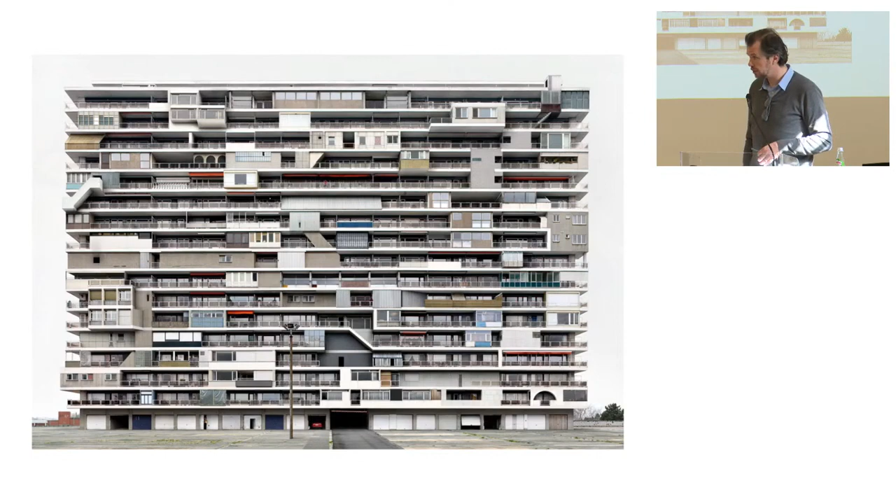So I had to find a way to make new imagery where I had control over every aspect of an image, at least as a representation of architecture through an image. And that's how I came up with this technique of the photorealistic photo collage, that exists out of fragments of photographs of real buildings. So all the collages you see are constructed by images made by me.

Not my regular architectural photography, but I really go out in the field. I make a design, for example, and then I go out in the field to photograph all the textures I need for constructing this fictitious building.

In the beginning, I was very interested in the building as a sculpture in space, as a volume with its own silhouette, with all its techniques to make a building spectacular, like the cantilever. It's a trick in architecture that's often used to make a building expressive. So I give comment on that.

I reconstruct it, I enlarge it, I make it more radical to the point that I think it's still plausible. So I walk on the thin line between reality and plausibility versus science fiction. It's a fine line, and I try not to cross it.

Also, humor is part of the work. It's a very difficult subject in architecture, I know — maybe that's content for a next symposium. But of course, I'm a Belgian, and Belgian surrealism is apparently in our genes. So the surrealistic humorism is certainly present in my work.

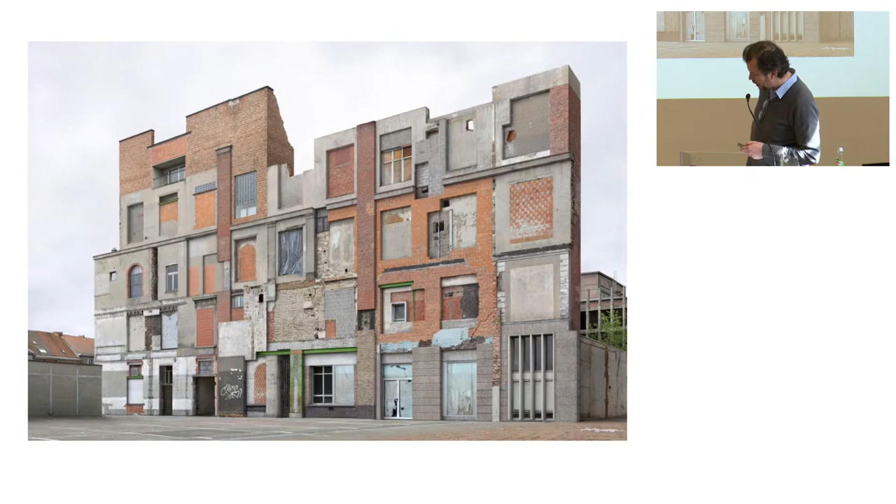On a slightly larger scale, I made an intervention in the concert hall of Bruges. It's a quite iconic building in Belgium, designed by Robbrecht and Daem on the outskirts of Bruges. It's a very finished box, and for me it was very challenging to question when a building is finished — when it becomes an icon, is it then becoming a dead building?

For me it was very interesting to question the status of this building by adding tiny additions in red brick. And on the rooftop, I built this small structure in actual bricks, to be clear — it was really built on top of the silhouette of this building.

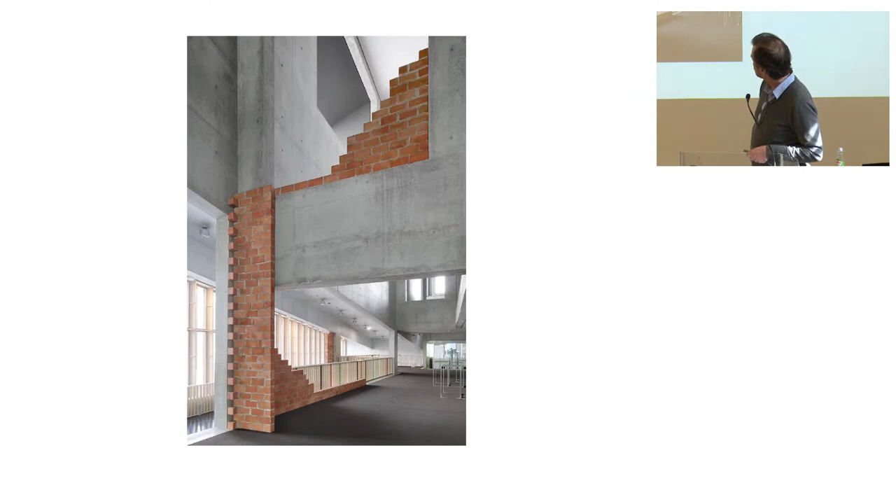And on the inside, in these concrete spaces, I made these alternative structures — of course completely nonsensical, without a program, but only questioning the status of the actual space by adding new structures, suggesting an alternative logic to the building.

That image became the basis to again build an actual installation, in a museum in Hasselt, in Z33, where I built these parasite walls inside the white museum spaces, and they give another view on the city, or a slightly different view on the city.

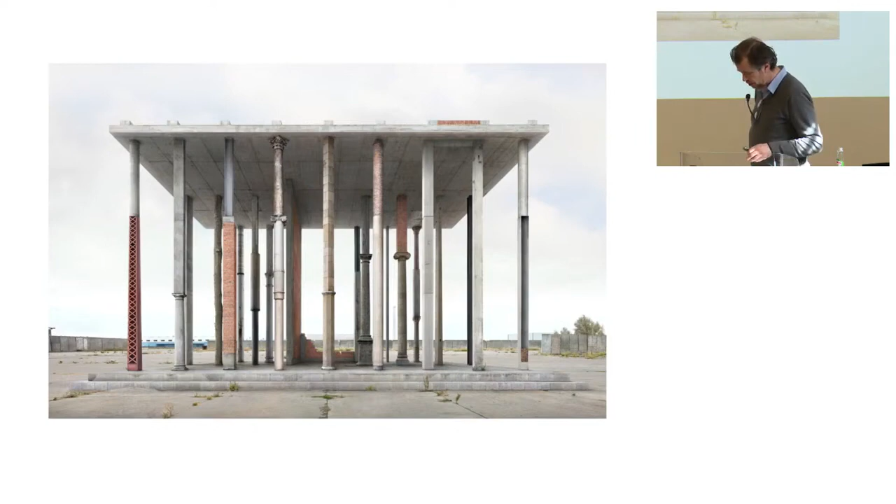You see them here standing in the garden, just standing on their own. In fact, it's also a celebration of that typology in architecture, just by placing them as such without program, as a kind of folly architecture, just bearing a roof placed on a stage of two steps.

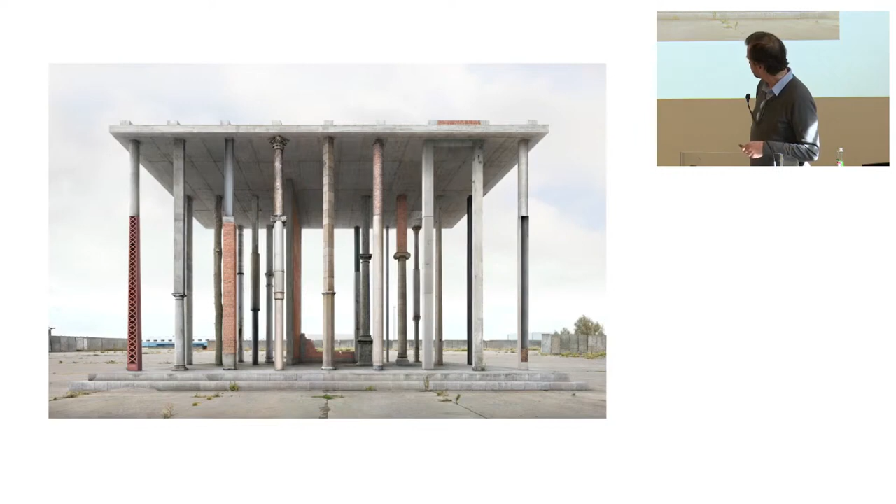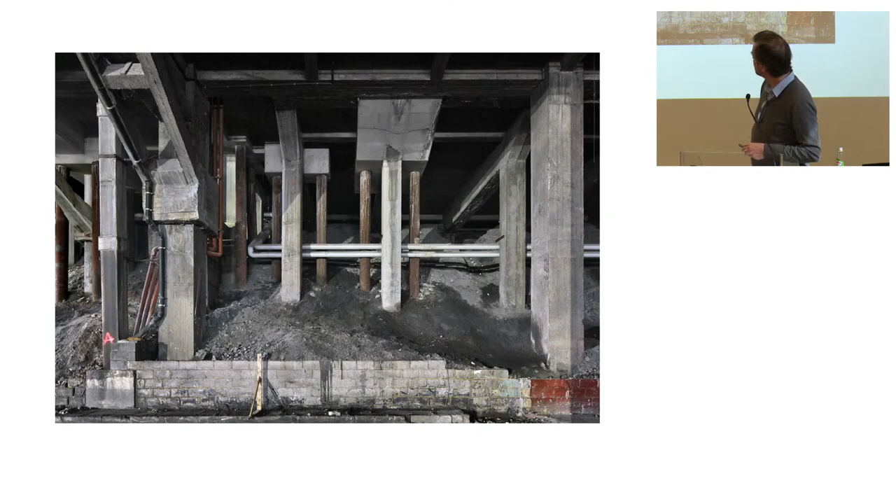This resulted from a reference to an actual architectural photograph I made of a project in Belgium. Before renovation, this was the cellar of an old Congress building in Charleroi, and it was amazing to see that the upper floor was supported by all kinds of weird columns in different shapes. So this really made a reference to the previous image.

The column, again, I made this installation in the same museum, and I displaced this column, and I put that on a step of the staircase. So you have a completely other appreciation of this typology of a column. Just by climbing the staircase, you have this sequential vision of what a column actually is.

Then I made this column, a bit of reference to Brancusi, of course. This stacking of this very basic breeze construction bricks into a five-meter high column. That was very funny to see, but I don't have the video. It was moving in the wind, so it was a moving column. When the wind blew, you saw the bricks dancing in the air, so that was quite nice.

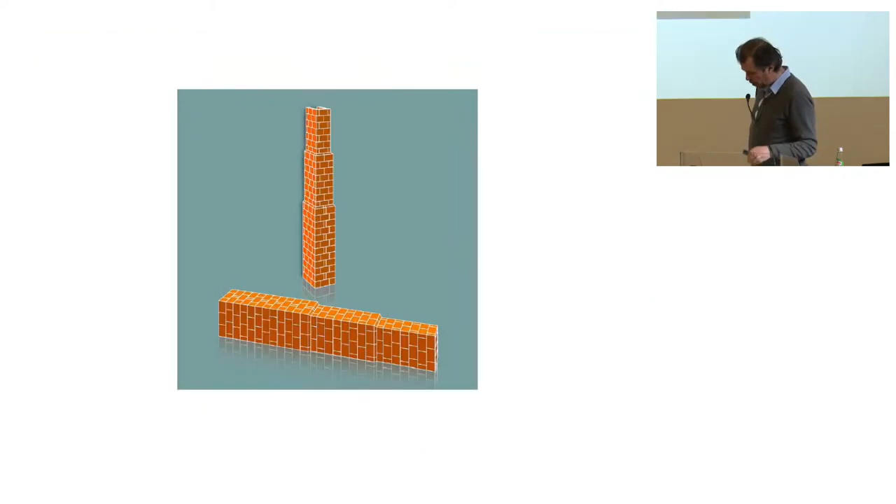Another typology, very common, is the buttress or the support of a building. And this typology I applied in an existing castle in Flanders, a castle in a very bad condition, almost crumbling down. It's a very iconic place, but not well maintained. And there I built these two buttresses that I wasn't allowed to touch the building, ironically.

So it needed really support, but I couldn't touch the building. So it worked out fine that the buttress stood on its own, and it had to keep itself in balance. It was not leaning towards the architecture. And the other one was already detached from the building and was floating in the water.

As an insert image, you could say, is that architecture, if I may say so. I'm not an architect, but I guess architects have to work with a certain vocabulary, with some elements that are fixed. You still have to work with the door, and you have to think about the door every time, and where to place a window, and how the roof will look like.

So, in essence, an architect has a shelf in its office and has to take, metaphorically of course, the right elements and put them in a certain order, and then you have architecture, probably. So this is a kind of vision of a giant shelf where you can pick all the pieces you want.

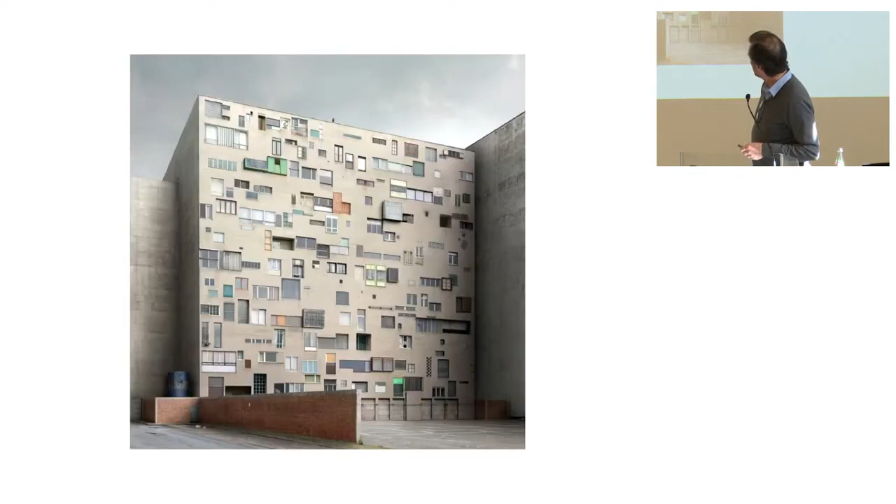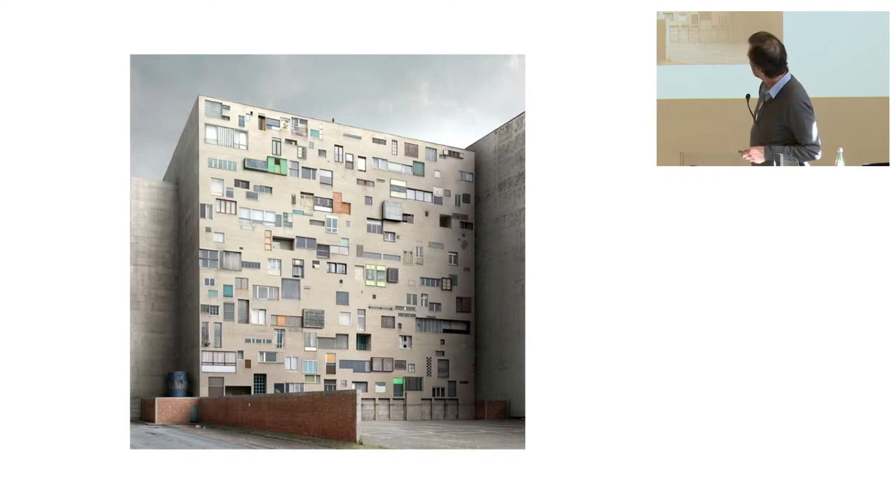A next image, a collage, I think it speaks for itself. It's a kind of time lapse of different styles of windows compressed into one building, expressing the identity of the inhabitant.

Another project, also dealing with the basic typologies in architecture, but placed in a certain sequence. This is a project near the river, the Leie in Kortrijk in Belgium, where I built in essence a wall of around 40 meters in length. But the wall is kept straight by all the basic typologies in architecture, like the roof and the chimney and the arch and others. It's a kind of compression of the language architects use in one gesture.

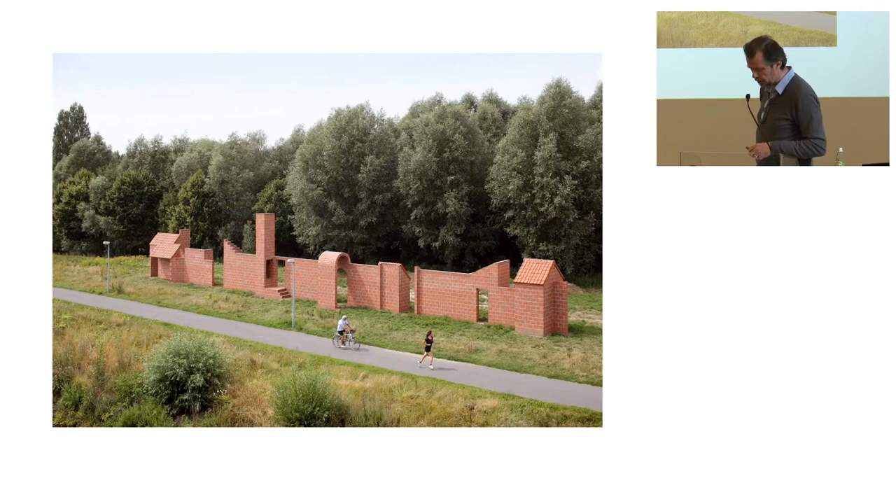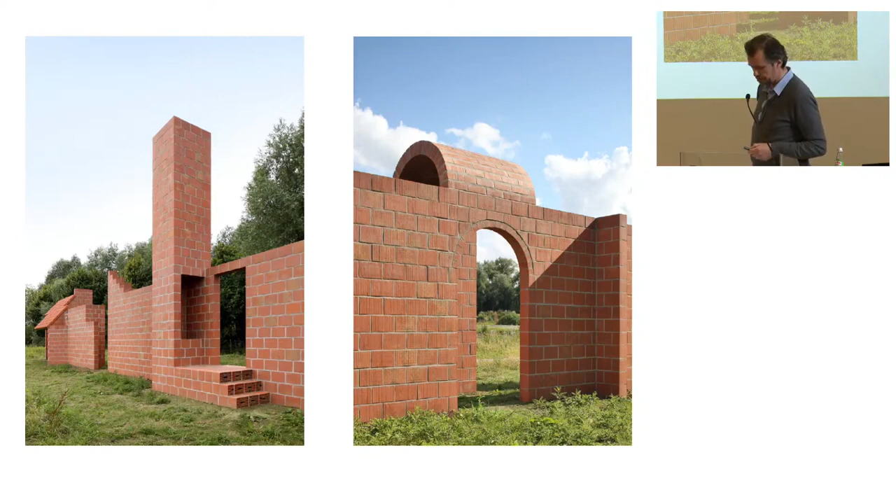Of course, the roof is the fifth facade of a building, a bit underestimated often.

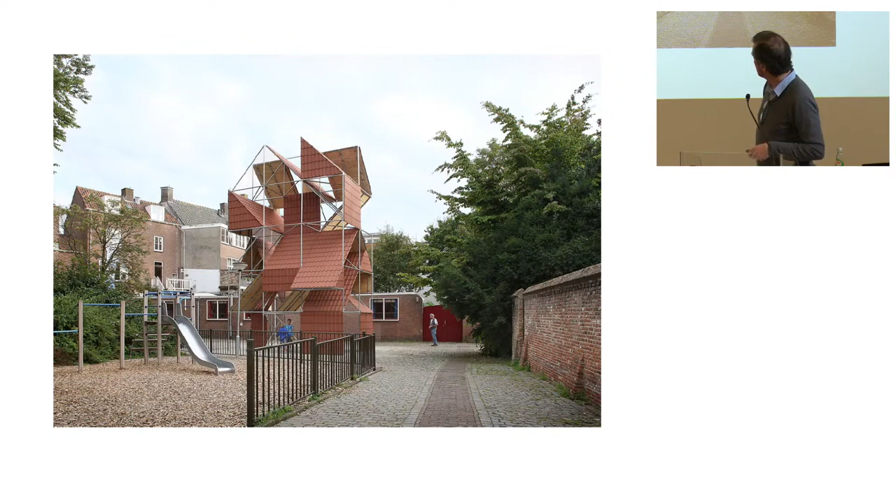This also resulted in a spatial installation in the midst of the historical city center, where I used the roof as the fifth facade and as a typology in a kind of spatial grid, using ceramic roofings in a certain sequence — a metaphor for compressing the city into one gesture, with the size of an average house in the city.

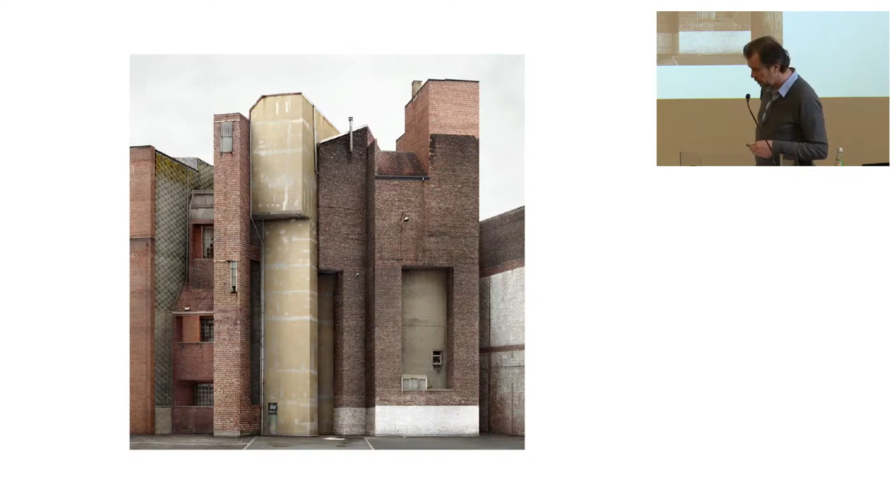Of course, architecture is all about proportion, proximity, and silhouette. For me, it was quite interesting to explore how an ensemble of maybe not-so-interesting separate parts can become exciting if you put them together in a certain sequence with a certain proportion.

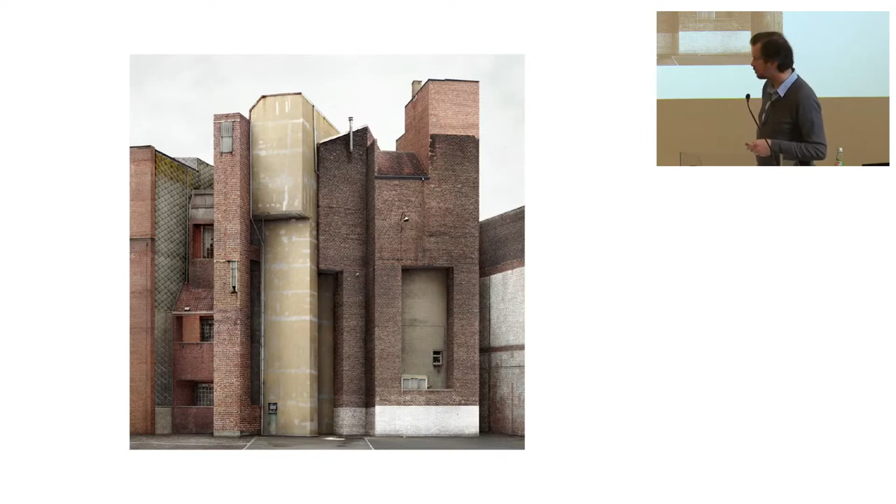The same is going on here. It's also exploring the tectonics of a building. It could be a high-tech building, but it's executed in a very low-tech way. This contrast between the planned and the improvised is also quite present in my work.

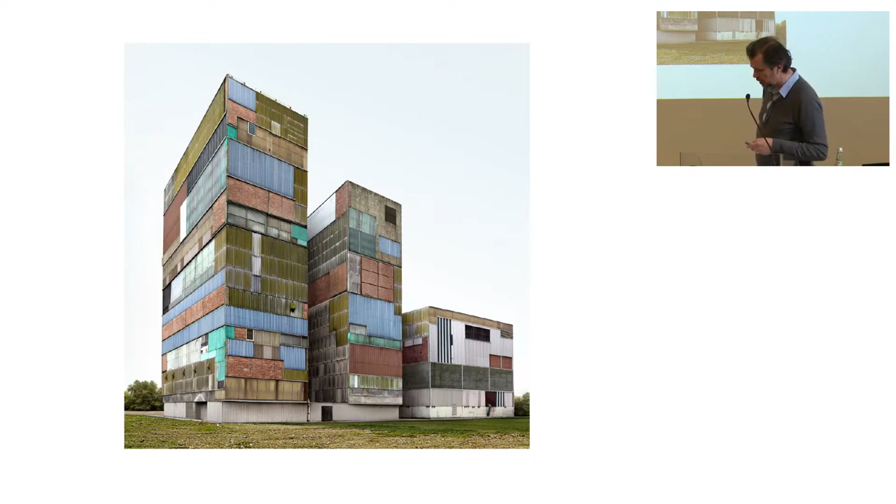Even on a bigger scale, this is an inventory of some Chicago towers, but placed in a different grid, and together they form the silhouette of a big house.

Also thinking about nature versus culture, or nature versus architecture, and all the zones in between — the transition between the city and nature, and where it collides. So this is a collage dealing with that.

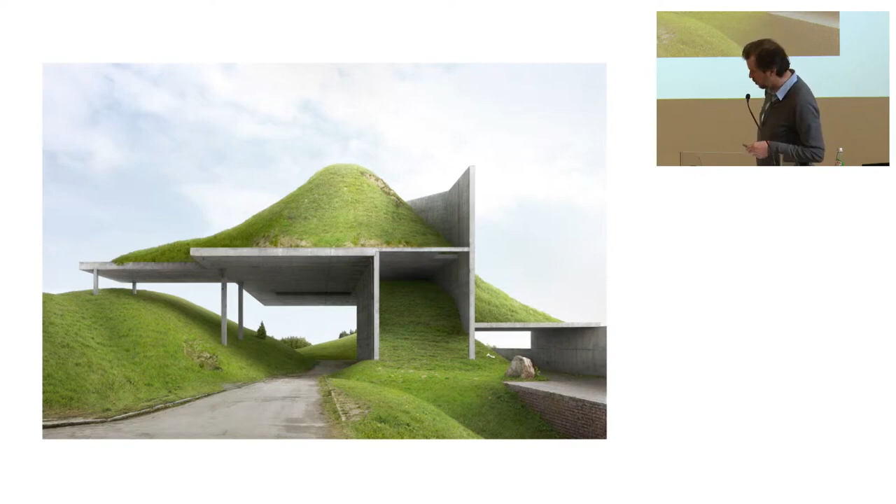Another collage — you can question which thing was first. Was the rock placed there afterwards, or the other way around?

That resulted in a project where I used this rock, and I worked on it because the original rock was really an existing rock in Morocco I photographed, placed on the Belgian coast. This is the same silhouette of the same rock, but executed in concrete.

I photographed these fake grottos in concrete — you find them everywhere, this fake rock in concrete — and I put it on the original silhouette of the rock. Then it was printed on a giant scale, on a kind of billboard, and placed in the midst of the landscape of Bruegel.

You were talking about — no, who was talking about Bruegel? Val. Yes, this was for a project for the anniversary of Bruegel, who worked and lived around Brussels in this typical landscape. He painted that landscape with rocks, so he was a kind of Photoshop artist avant la lettre.

So what I did was use the same technique as Bruegel, putting a rock in the midst of this landscape where it doesn't belong, of course — a Fremdkörper. I made it even more artificial in two ways: it's in concrete, and it's flat. This is an emphasis on the artificiality of the landscape in general, and specifically the Bruegel landscapes.

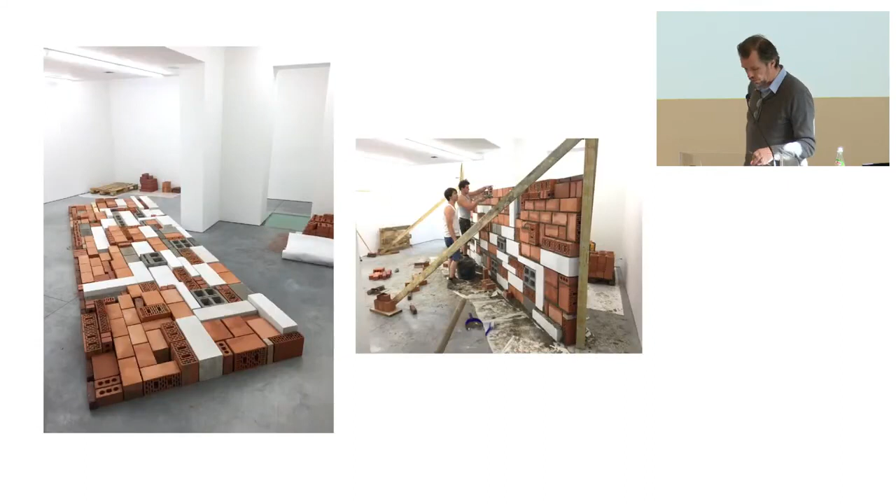Speaking of cities, another project I did in a gallery was building a wall with the most common building materials, bought at the do-it-yourself market — these breeze bricks and Ytong bricks. I built this very well-defined wall as a metaphor for the complexity and diversity of a city, compressed into one wall. In the end, the wall was erected and looked like that.

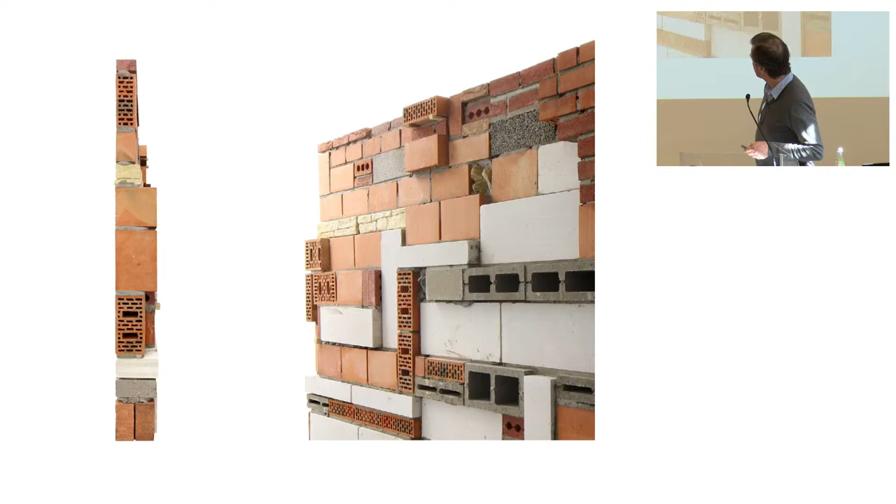It reminded me of the Pikionis architecture on the Philopappos hill and the Acropolis hill in Greece, where the architect used remnants he found on site, old remnants, and built these beautiful pathways and a new wall around an existing church. This is a fragment of that church wall.

Another one in Greece, on the island of Paros. I found this incredible building existing out of fragments of ancient Greek buildings, which were later stacked in a different way into this amazing tower-like building.

In the end, I think the fate or destiny of a lot of architecture is to be crumbled again to dust. Not in Rome, but in some other places.

I made this virtual pile of building debris where, if you look very closely, you can see all kinds of references of contemporary concrete, but also these ancient columns and statues. So it's a kind of compression of architectural history in a very deconstructed way.

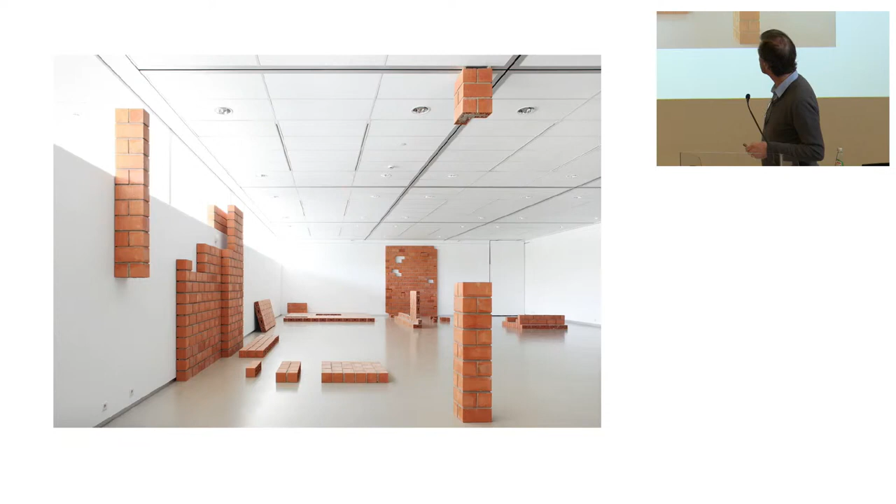And then out of the rubble, new architecture emerges. The most basic architecture, as I heard already, is creating a void. If you build a wall, you have a boundary. You create an inside and outside space.

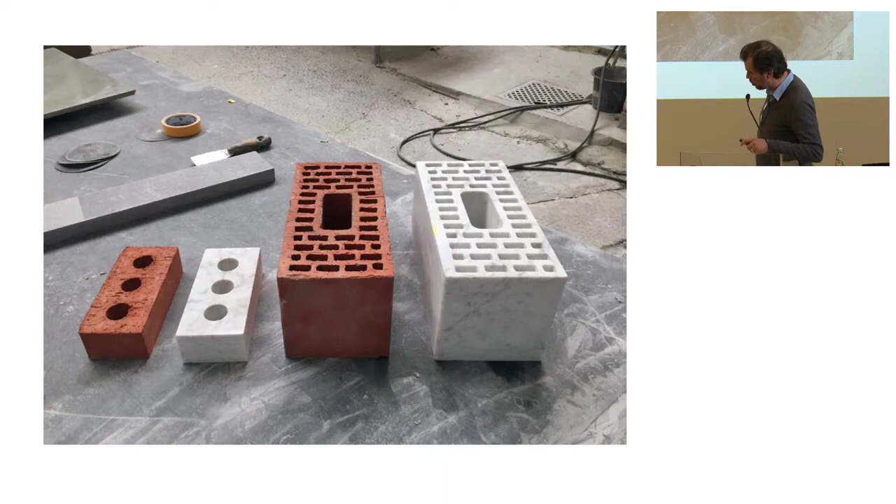And then, to celebrate my fascination for the brick, or the breeze brick in general, and the potentiality this pixel of architecture has, I made a replica of this red breeze brick in Italian Carrara marble.

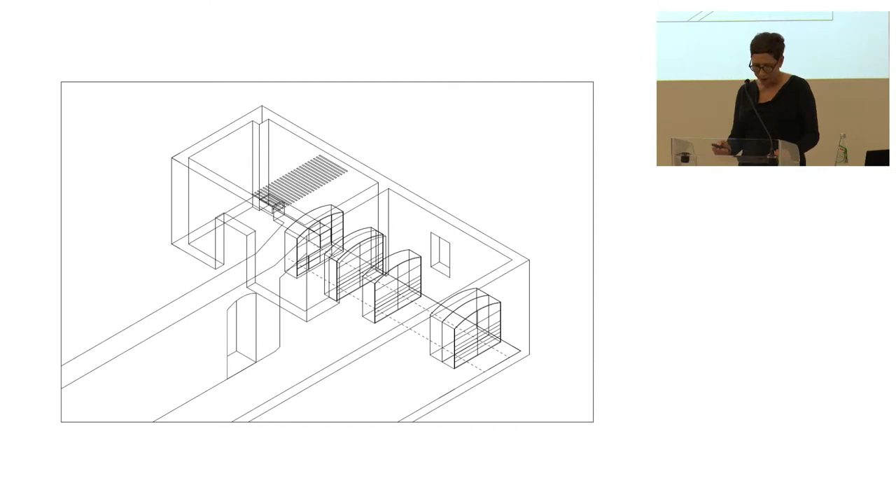The design concept for the space is based on the intention of largely retaining the studio rooms and kitchen as they were furnished by the artist. The new piece is made up of several elements painted the same shade of white as the walls.

When pushed together and closed, it forms a solid unit. When open, its differentiated and colored interior is revealed, whose outer contour corresponds to the existing opening between kitchen and studio. So you can see the kitchen in the back.

In order to use it from both rooms and also allow the closed unit to be moved to either side of the opening, it was equipped with trolleys and rails, and laid in the floor.

The piece of furniture makes it possible to set up the workshop in the heated kitchen in winter and close the opening. A dimmable light panel on the joist in the kitchen reinforces the room concept by accommodating and developing the lighting system, which consists of rows of narrow fluorescent tubes as found in the studio spaces.

The tubes in the studio space were still decided for by Michel before he died, and we took the same tubes and made this dimmable set of tubes to allow for the kitchen to be an exhibition space when lit, and to be a kitchen, or the kitchen, how it was before.

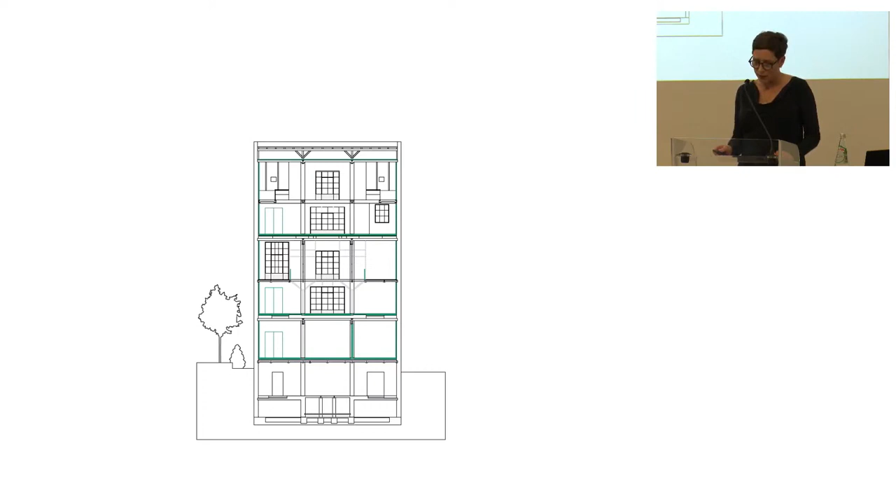The building in Berlin-Mitte was designed by the architect Hans-Heinrich Müller in 1928 to accommodate distribution facilities. The listed building was later used as a substation, which had been disused since 1998. Its facade of red blend brick and the vertical bands of narrow windows, behind which a sculptural staircase leads to the utility stories, are clearly visible from Neue Grünstraße, as the original front building no longer exists.

The transformation envisaged a change of use in the former substation and its grounds into an art gallery. To achieve this, the building was gutted and its steel skeleton exposed in the process.

We didn't touch the staircase, and with the people who were responsible for the Denkmalschutz, we discussed that we would protect the facade and also the space behind. So it's a kind of 3-dimensional facade that was protected, but the room behind was transformed.

We also worked with Anne Borsell, who's missing. She cannot be here, but she consulted us as a lighting designer, which is very nice.

Here you can see the floor plan with the neutral space. The basic layout contains 3 double stories with slightly raised ground floor and 2 exhibition spaces above, each consisting of a full floor and a gallery floor. This is what you can see here. This is the second double height exhibition space.

The architectural concept is twofold. It is based on the preservation of the facade and the staircase with industrial glazing, which is typical for the period, and on creating mainly neutral spaces at the rear.

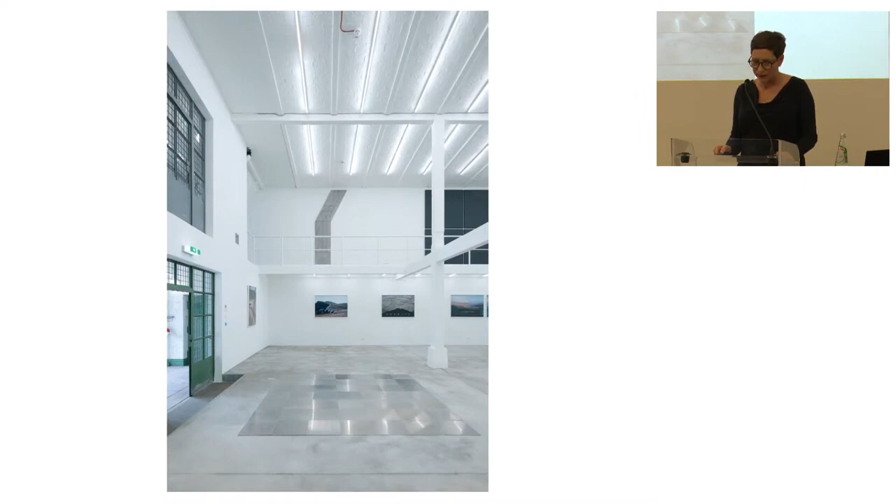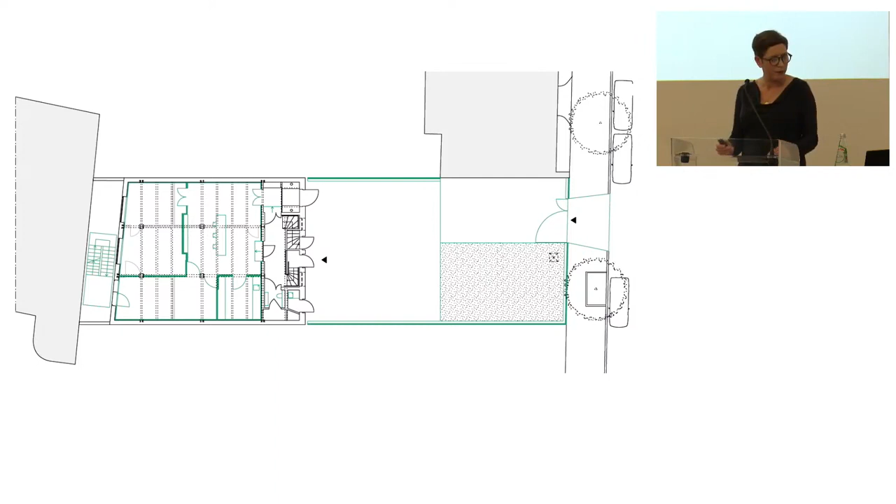Along with the renovations in line with heritage protection requirements, the necessary structural improvements, and the installation of building services, special attention was paid to the gallery spaces, their surfaces, lighting fixtures and fittings, as well as the fenced-in grounds. So there's a garden in front because the building is missing that was there before.

And here you can see an artwork by Thomas Schütte. We also met Thomas Schütte before. So it's a kind of rotation, I have the feeling.

And the garden we made, the fenced garden we made, and also the view on the public space of the street with new developments from the 1990s, because this site is almost where the Berlin Wall had been, so it was a vast part of the city.

So the last project is a housing project. It is in Fürth, in the south of Germany. You can see, again, a Wilhelminian building. It's very different than Berlin. The city became rich in the second half of the 19th century during industrialization, and it was based on more than 20 mirror factories in the city of Fürth.

This is not a mirror factory, but it stands for the industrial past of Fürth. And the project is the transformation of a former mirror factory. We couldn't keep the buildings because of all the poison, the quicksilver poison in the ground. We kept one brick building, a kind of forge that is now a workshop.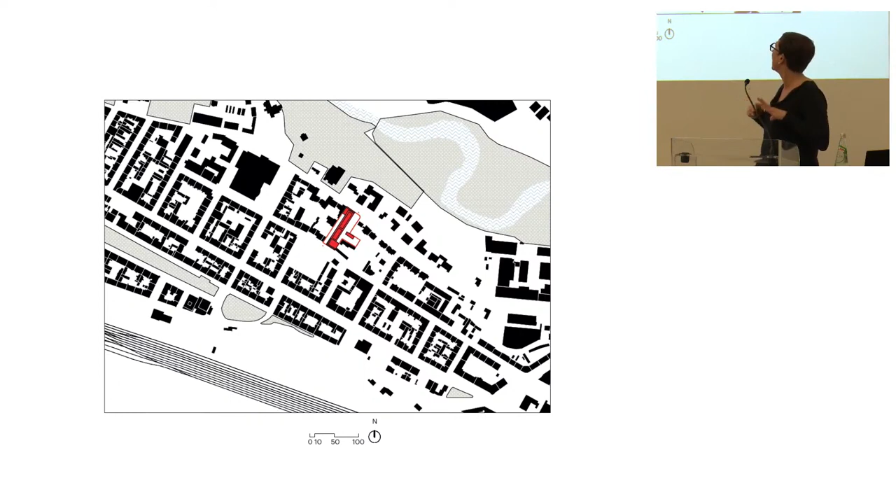And what is interesting about the site is that it goes through a block, so there's block buildings on one side, and then it goes down 4 meters. And on the other side, in the north, there is the river Pegnitz and the lands that come with it - it's the city park now, but it's rather a landscape and suburban part of the city.

And we also found in the inner city, in the medieval city of Fürth, these passages, and we proposed a very dense building on the site, not without proposing a public pathway through the site from one street to the other.

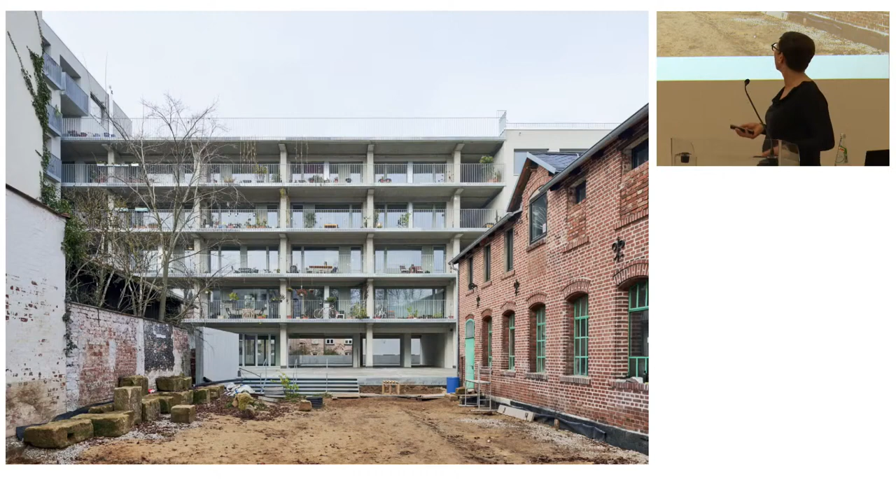This is the forge on the right side, so this is in the middle of the site. This is a detail of the galleries that access the apartments. And this is the most important plan from my point of view. It shows the ground level, and you can see that the ground level has 2 heights.

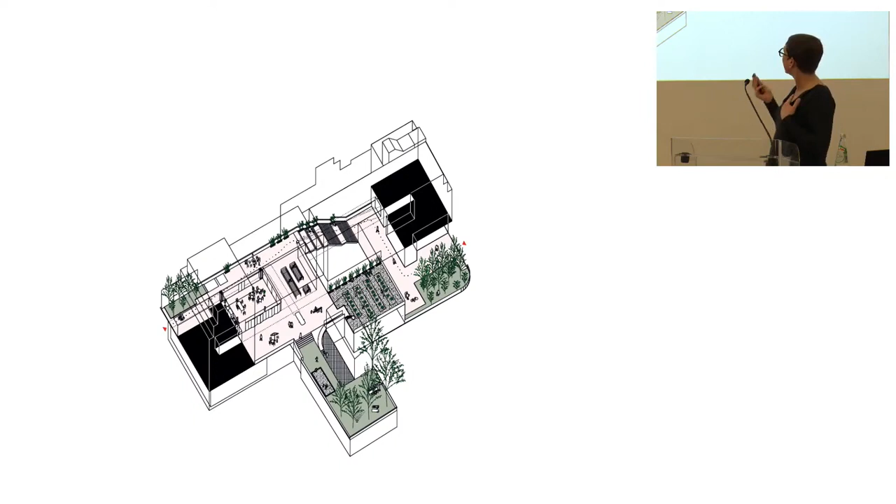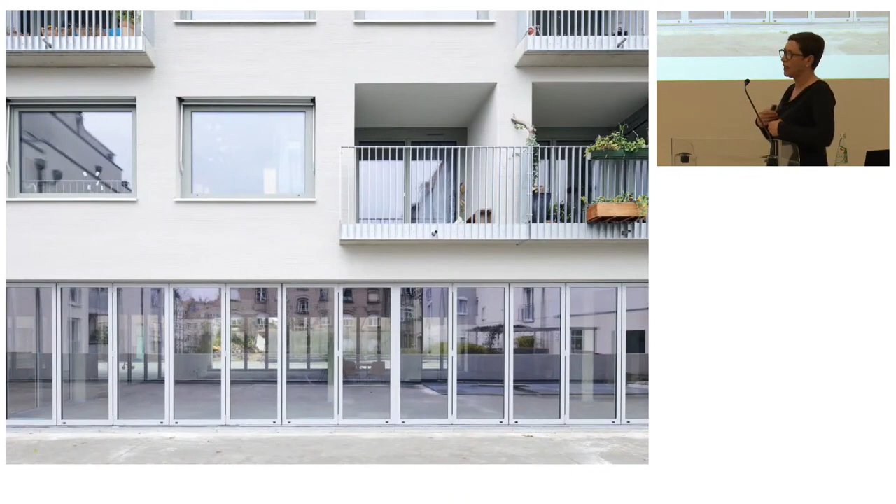And we worked in detail on how the ground level could be enriched by different spatial characteristics, such like gardens, the pathway, a staircase that also serves as an auditorium. And there's also a communal space, it's called the Spiegelsaal, and it can open widely, and then it is also connected to the public pathway. And this is the staircase still covered, because it was still the construction site.

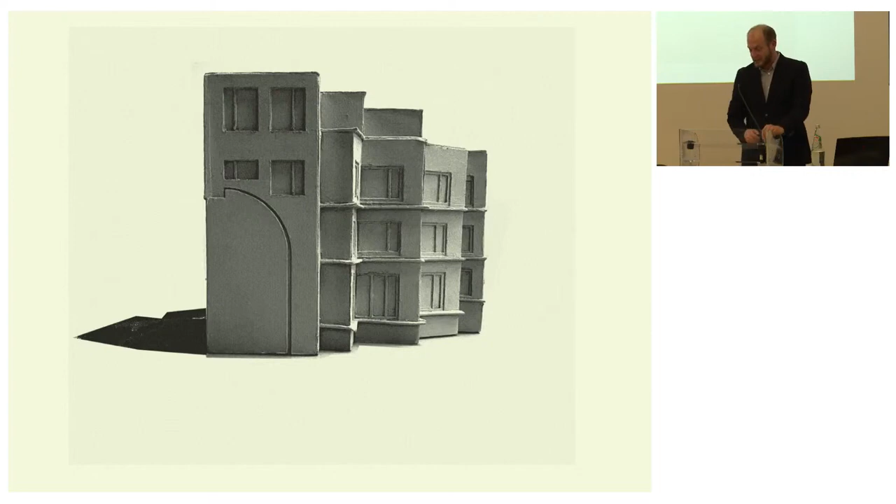This is a building that we are currently working on. These two references, Palladio and Borromini, we had in our minds while working on the small domestic building in the medieval city of Grave, which is in the east of the Netherlands, close to the German border—something we have on our tables currently.

The building is situated on a triangular plot, and it's visible from all sides. It's close to an old fortification wall. The building marks the entrance of the historic city, and therefore wants to relate to the existing historical buildings there, which might best define it as a sort of oxymoron, as it has to unify two demands in one—blending in as well as standing out and announcing—with an ambiguous building as a result, merging several buildings into one.

And the remaining fortifications in the city of Grave also comprised a former gate, which was later transformed into a local museum, where we were making a relation to this old brick structure, although it would be impossible to ever experience both at the same time.

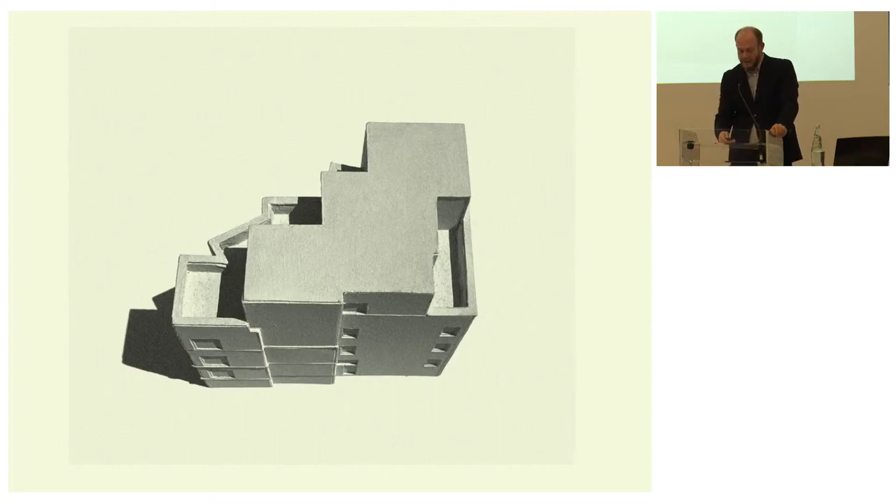Among several questions for us, the most prominent was how to act in public, although initially fit for a domestic function. Simultaneously, the aim is to charge this building with a theme that goes beyond the private and refers to the public. This building should not literally become a gate, it would not fit on the plot. Therefore, we would follow the strategy of making a building that suggests being part of a bigger whole, making a relation with the official gate, containing elements indicating the former fortification and making visitors aware of entering the ancient city.

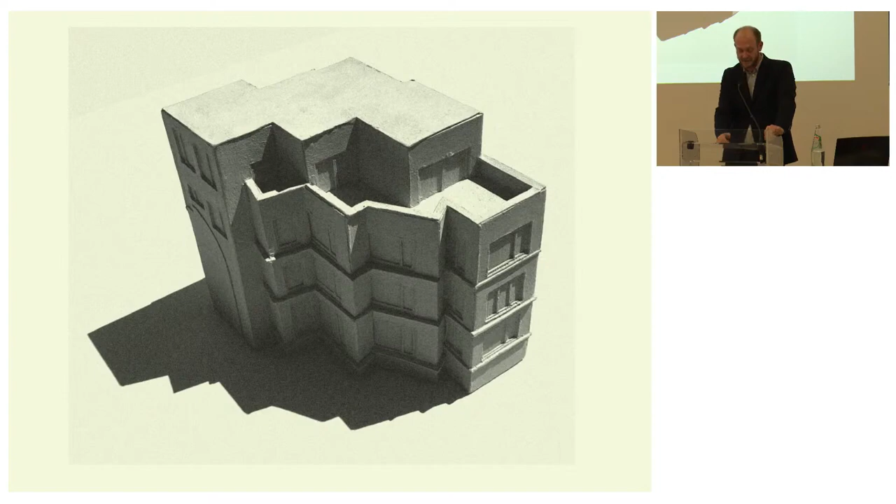In this specific situation, a balancing act between being figurative and being abstract was required for building up a narrative without using all the possible vocabulary, how to suggest being a fragment of a larger whole. The internal structure of this building is made secondary in order to shape the building by its urban setting and its role as a gate building.

The inscribing of the new building into a longer line in the history of the city is made primary. Not everyone will understand this implicit invitation to explore. Suggestion is an attempt to evoke curiosity, and of course this also requires a refined observer. As you can see, it's still a model. It might get realized, I hope so. Otherwise, it just remains a suggestion and exists in the world of ideas.

Although we as architects were trained in clearness, completeness, and efficiency, it is necessary to allude to other questions and build up narratives on other logics. When no full cohesion exists any longer, one is forced to recalibrate and explore other forms of order and other orders of form.

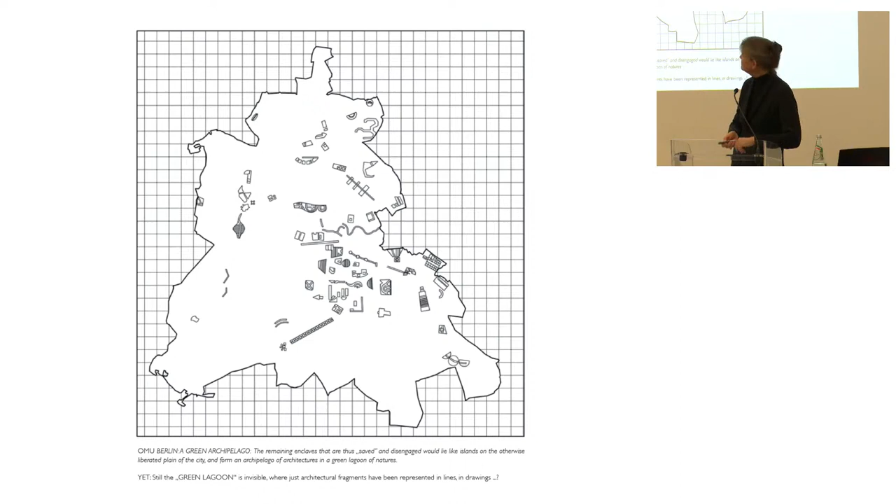On the other hand, when you are in Rome and you see all these fragments of the wall, of the aqueducts, and the Aurelian wall or the other city walls, they still exist. I think this fragmentation of the wall gives us a hint how much the wall as a fragment will influence our perception of space. And this is maybe the point where I would start, that my perception shifts when I have a fragmented wall in front of me.

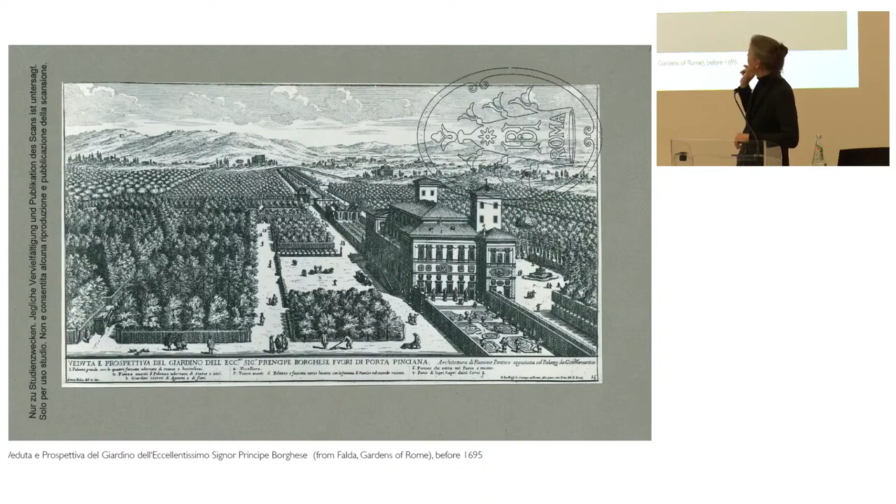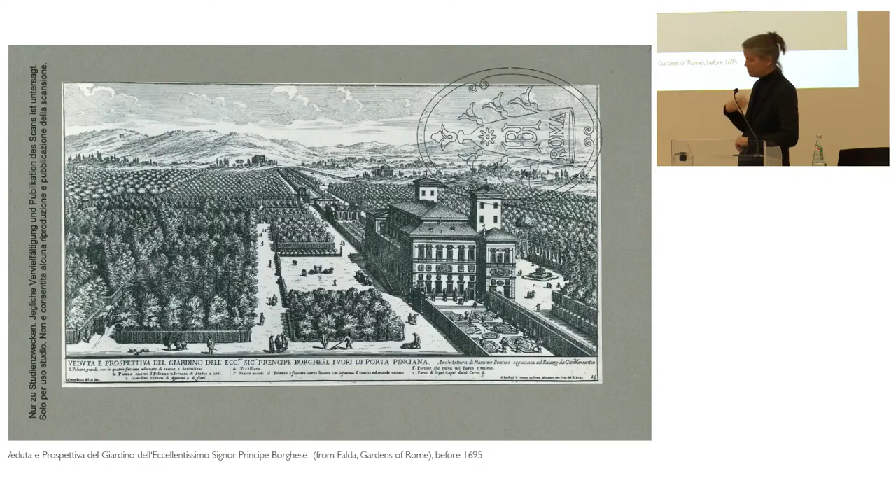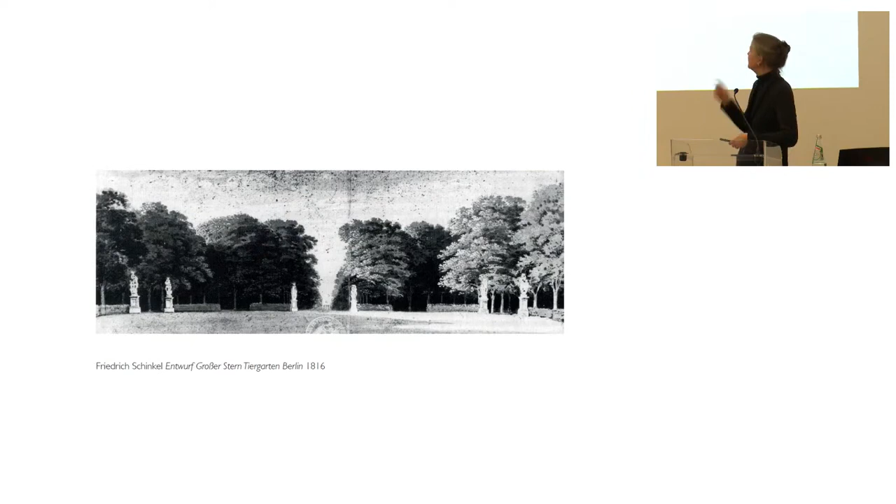But Schinkel also, in his sketch for the Tiergarten, started to surround each part of this forest-like garden or park with a built boundary.

And when I was living in Japan, of course, I only had the images to study, because at that time, in the 90s, I couldn't go to the library just to read, because I was not able to read Japanese. I could speak Japanese, but I couldn't read it.

So I had more or less only the paintings and the observations in the city and the temples, etc. And I ordered a lot of books from Germany to have something to deal with. And over time I discovered certain relationships between images which had basically nothing to do with each other, but still showed me this very similar intention of how to interpret space.

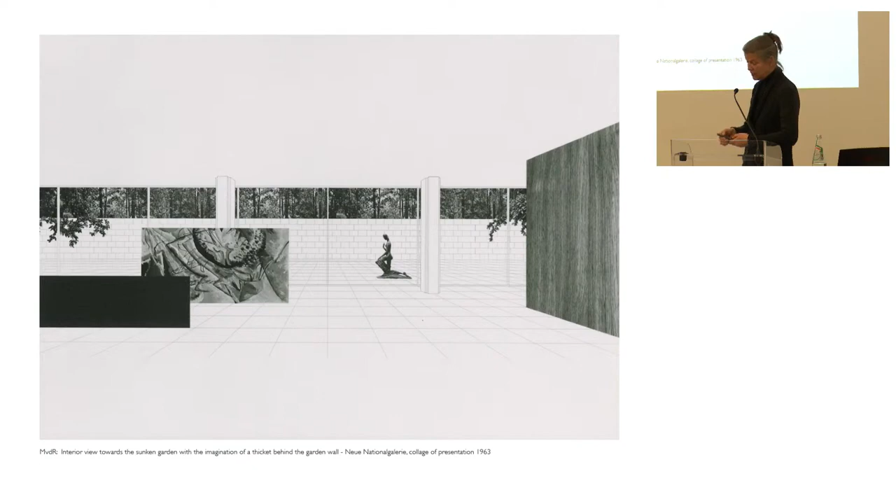And I was also very impressed how dense he imagined the space beyond this garden wall would be, because it's suddenly a jungle, a Tiergarten almost overrunning the place. You can see it in his site plan from 1963, where he was thinking to surround the National Gallery by a kind of forest - an interpretation of mine, but I would say it is clearly drawn.

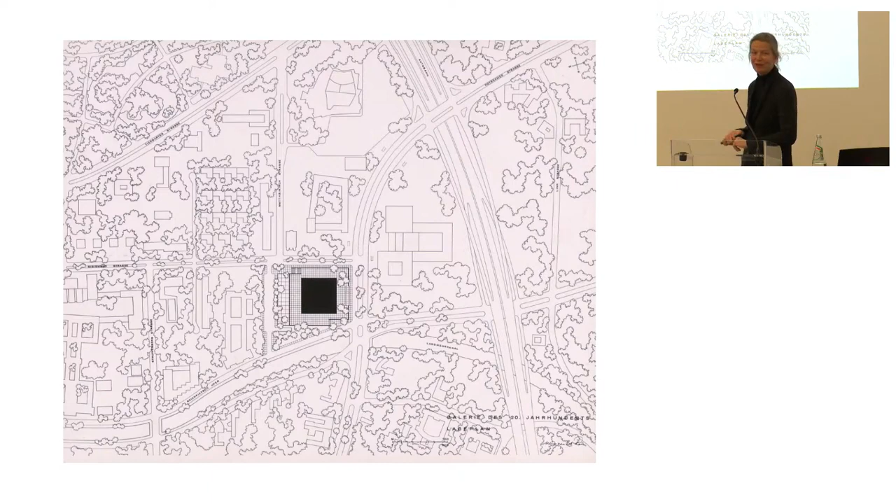And it was in an autumn where this garden was so beautiful. It was just the year before the National Gallery had to close because of renovation and reconstruction. And to my sad experience, this whole garden disappeared because of several reasons.

And I wonder how it will develop in the future, because this all had to disappear, mainly because the stepping stones were not safe enough anymore, I guess for the insurance companies, for the people. They wanted to make the space accessible again, and therefore they had to take it off. That's as far as I know.

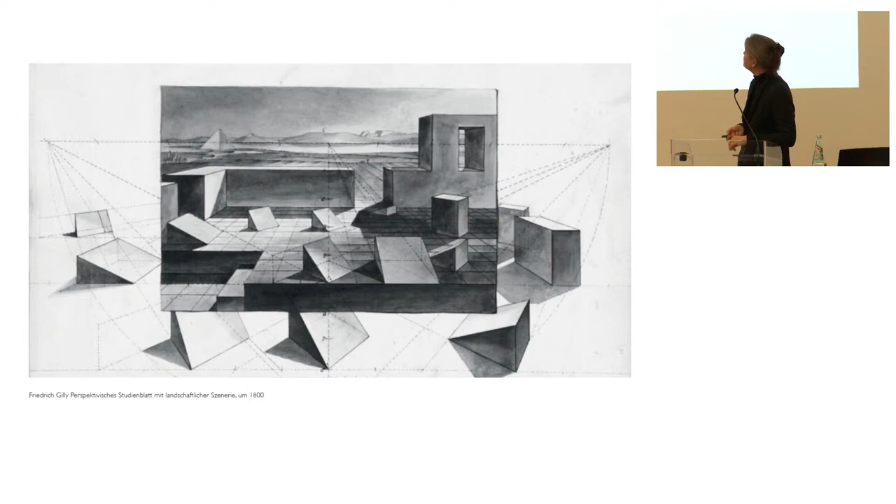Well, of course, a provocative statement. On the other hand, if you see the drawing by Gilly, the scenery, the landscape scenery with fragments, geometrical fragments, cubes, I see that it has this very, very strong relationship to this idea of a modern object in collection.

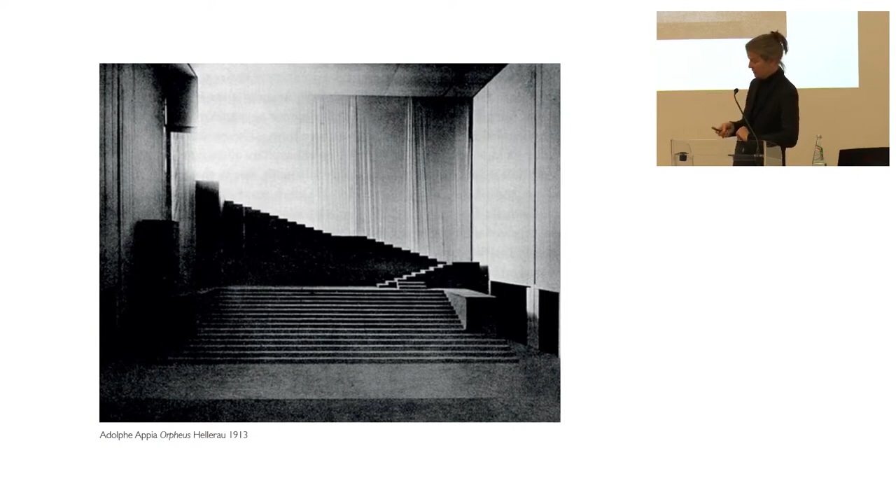And these stairs Appia developed, I was very glad that you also showed Appia today. It's for me personally a hint how we can use a monumental gesture by fragmenting it, and still you have this kind of power to define a place, to give a place an identity. And on the other hand, when you have the photographs of Le Corbusier, he seems to have the similar interest in this movement of the ruins of the ground, where the stepping stones are still left, but becoming a landscape in itself. So in a very archaic sense, I believe that this monumentality could help us bring forward our definition of space in the future.

And yeah, this image I love also very much, Mies van der Rohe just sitting in Epidaurus at the end of his life, thinking whatever he thinks, but when you see his stairs for the terrace, for the Farnsworth house, it seems also this is a fragmented classical movement of stairs.

And on the other hand, of course, I always have in mind some Japanese definitions of space, and one of the most impressive stairs I know are these stepping stones of Villa Katsura in Kyoto, because they're not at all comfortable, but somehow really define each stone as an object, each stone was fragmented in this grassland for this main entrance.

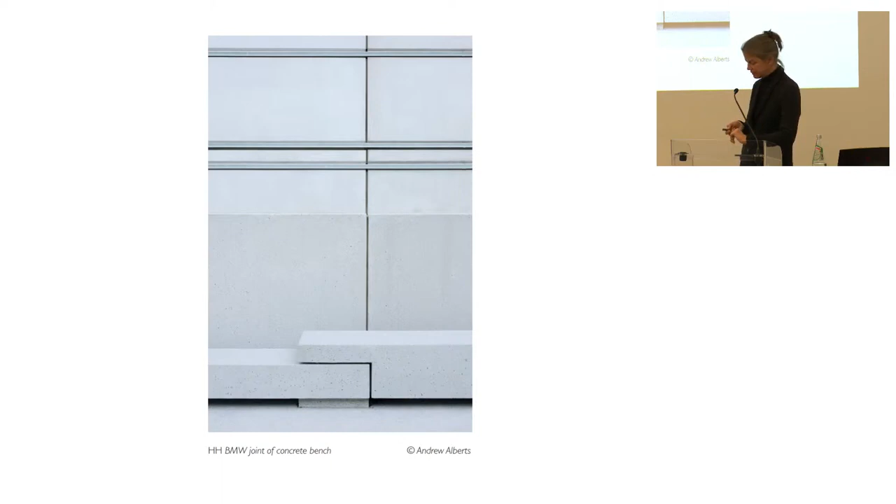And this was very important when I developed the bench for the Bauhaus Museum, because the Bauhaus Museum is a very enclosed, massive building. It has almost no windows, it's a solid enclosure, and everything inside seems to be more or less secret or hidden. But I wanted to break this movement of the facade, and therefore I decided for the long passage in front of the facade to have these benches.

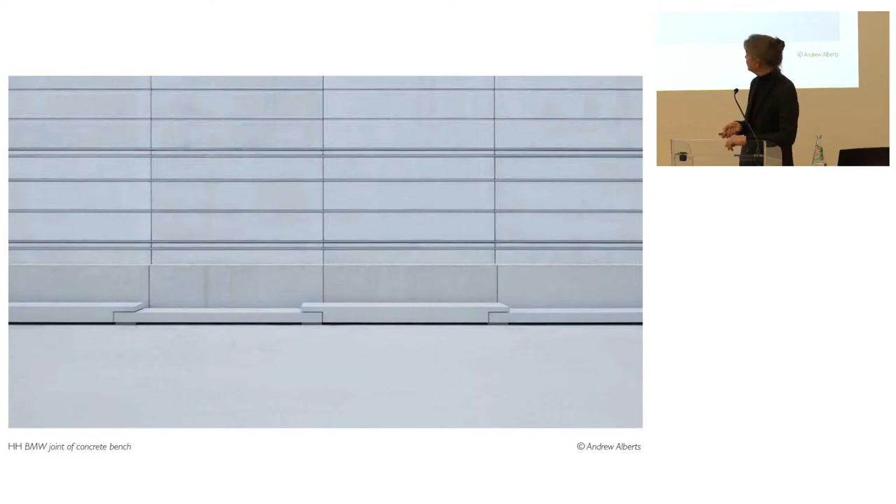And as I forgot to say before, I think the question of a stair and a bench is also coming together at a certain point. This is maybe starting with Appia's image before. So here you can see it also at the entrance in detail.

And this leads to a competition I did together with Ayşe Erkmen. She was asking me to join, and we were participating, I think seven teams were participating in this competition for the Kunstmuseum in Winterthur.

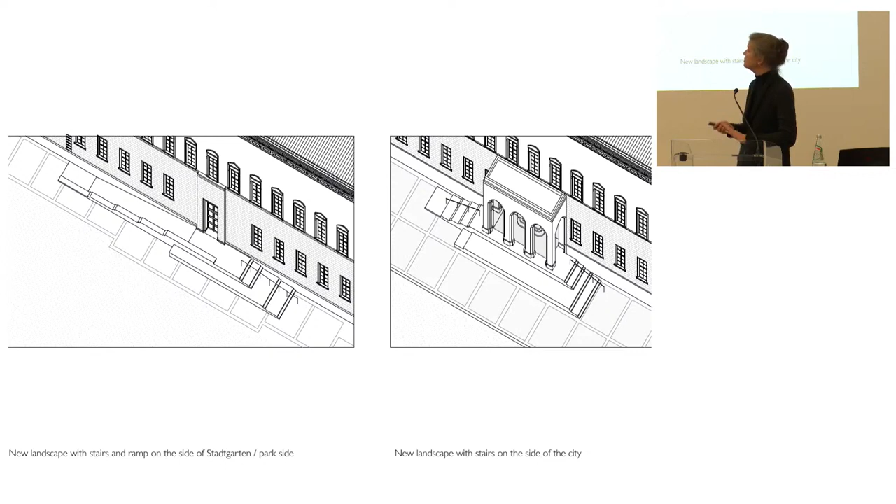We were asked to redefine the entrance, basically the entrance hall, but we decided to start already in the outside and create a new staircase, not only on this side but also on the park side, as you can see here. We wanted to have a kind of topographical landscape, so the stairs and steps would be both stepping stones and seats at the same time, to break, in a way, the monumentality of the building, but on the other hand also shift it to another usage for the people of the town.

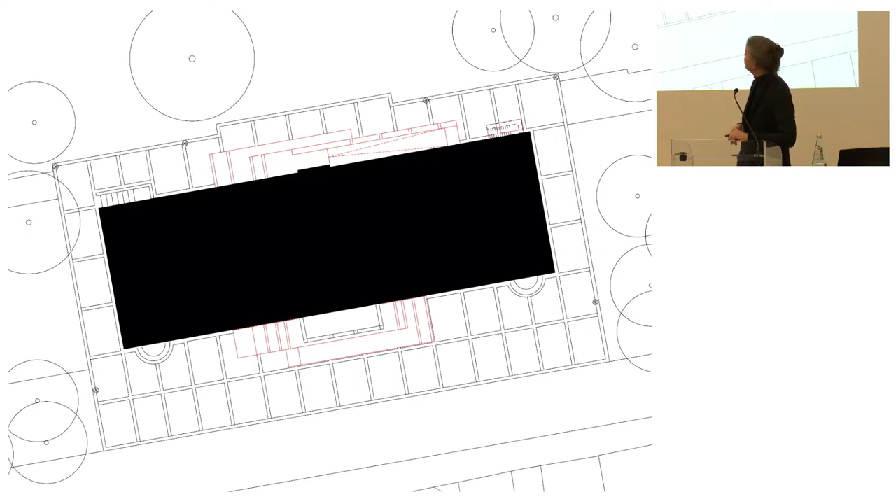And here you can see the black part is the building, and on the south you have the side of the city, and on the back side, north, the side of the park. And of course we had also to deal with the problem of a ramp, but I think it worked quite well, how to combine it.

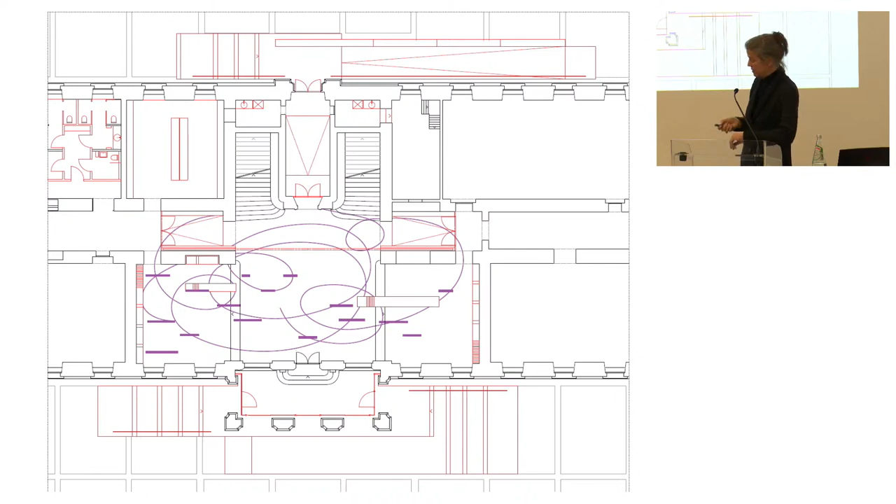And here you see how the space is flowing through from south to north through the foyer, and these elements are also in the same concrete, meant that there's this memory of the stepping stones outside, bringing it inside the space, and this is then the interior perspective.

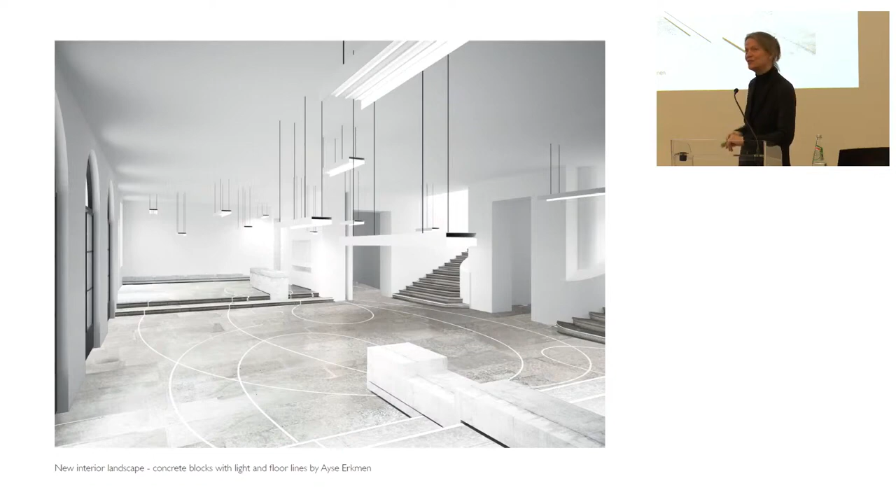So we are hoping to realize this project in 2024, I think. We have to wait because there is a big Caspar David Friedrich exhibition in between, so we are now finished with the design phase, and now we have a stop, and then we will continue again.

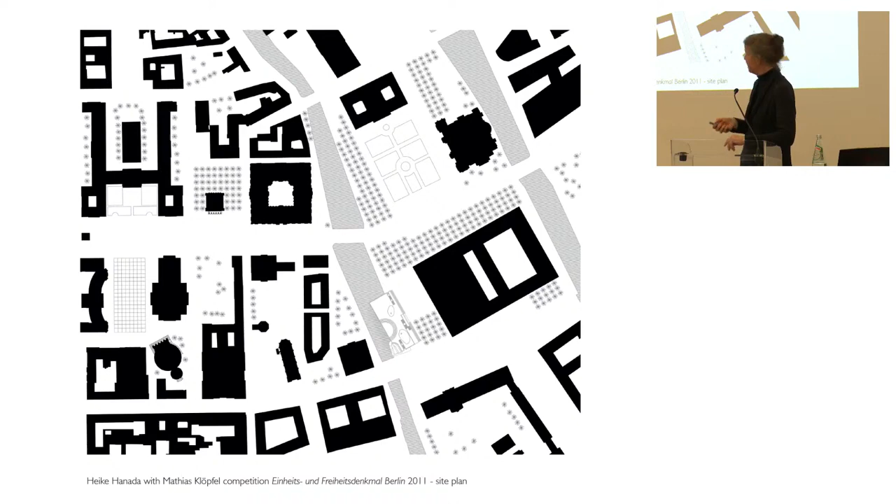To redefine a Sockel which was left over. So I'm talking about the Sockel of this huge monument of Kaiser Wilhelm, which was destroyed during the war. And as you can see here, the water is flowing through this Sockel.

And when I read the program for the competition, I thought it's impossible to think what is a monument for freedom or a monument for unity, because how shall we define it? And the only thing I then remembered, when I was still living in Berlin before the wall opened, was maybe this feeling when you could reach a roof and then you were suddenly underneath the sky, and you had this kind of feeling of being free and alone. So I thought it's an experience which is maybe solitary, so you feel more on an island, not too much in a public open space where everybody can see you.

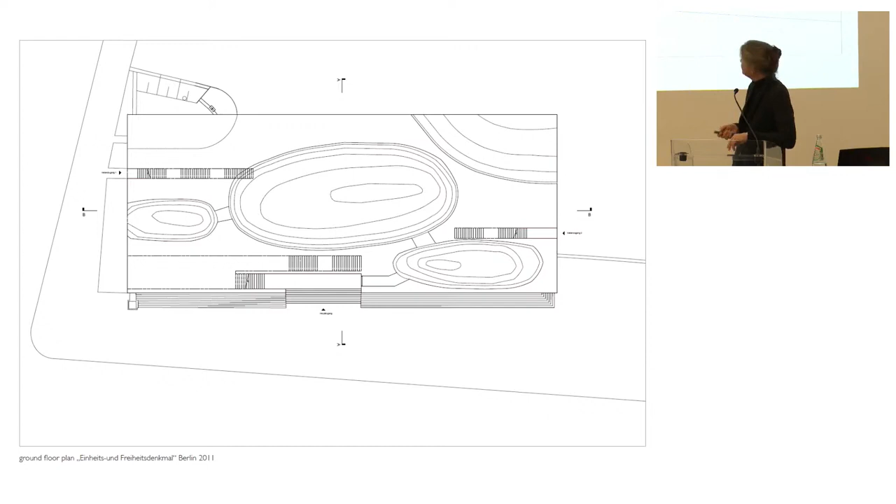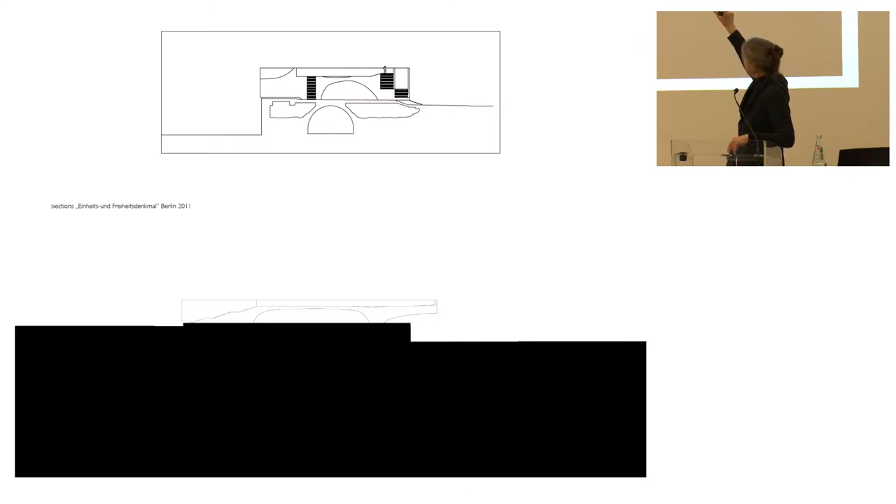So what we decided to do is to design a very organic landscape above the Sockel with several staircases going in, but it would have been surrounded by a wall. And you can see maybe here in the upper section, this tunnel where the water goes through, and then basically we just tried to double the volume, and you can see that this volume would have also hollows where you could enter. And from the outside, you would not see anything. So, thank you very much.

So, we can make a break, I guess. Break? No? Yeah. Can we? Or do we don't have time? No? Oh, okay. So we have to continue with the discussion again. Sorry, I was too long also. Yeah. Then we continue.

So we're almost there.

Heike, this was a beautiful closing of a circle with a void that you cannot enter. Before your presentation, I was making notes and thinking we should speak together at the end of this panel about incidents, intentions, suggestions, and I was searching for the fourth word. But of course it was there from the very beginning, from your invitation, and it is monumentality. Because monumentality is something that is able to enclose in a very certain way issues of meaning, of an idea.